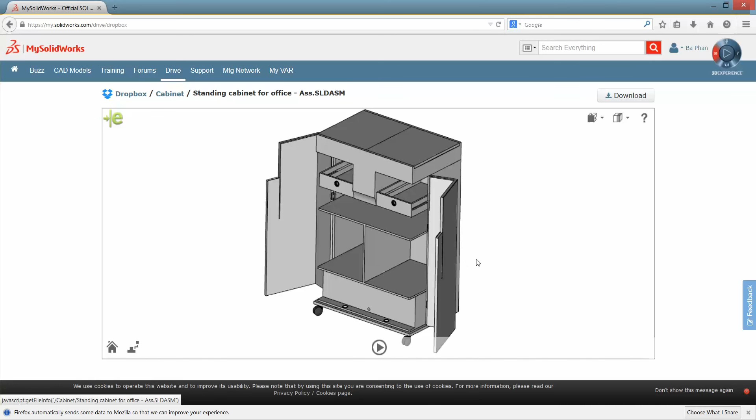So no installation of e-drawing is required. It works on Windows PC, Windows 7, Windows 8. It works on Mac as well - I have my Mac Mini at home running Mac OS, and it worked perfectly. It also works on iPhone, iPad, and Android devices. The user interface is very straightforward.

Press the left button to rotate it, press the right button to move it around, and then you can use two fingers on your touchpad to zoom in and zoom out.

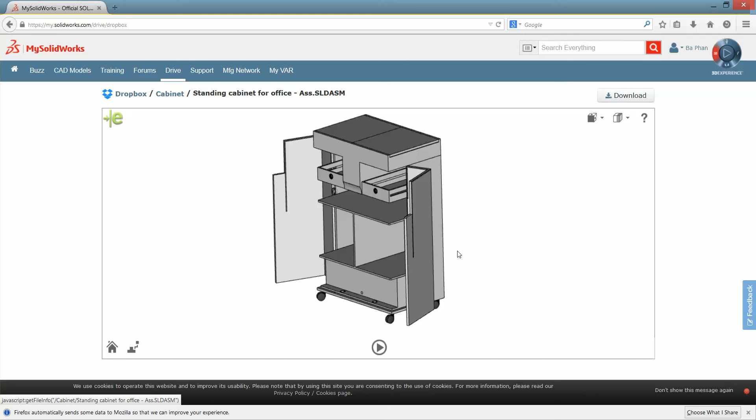You can change to a different type of display. Here you can change the view. I want an axonometric view. You can change how you want to display it, whether you want shading with edges or without edges. So that's this, brand new with MySolidWorks 2015.

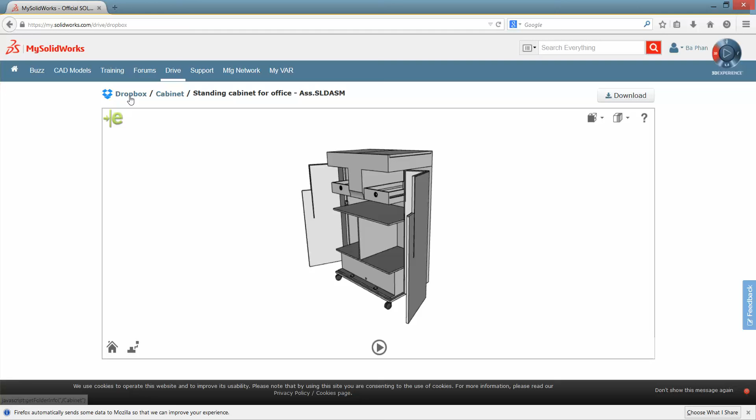Okay, go back to browse to another model. Just select Dropbox at the top. This time let's go to something a little bit more complicated. Remember the Holmatro? Here you go.

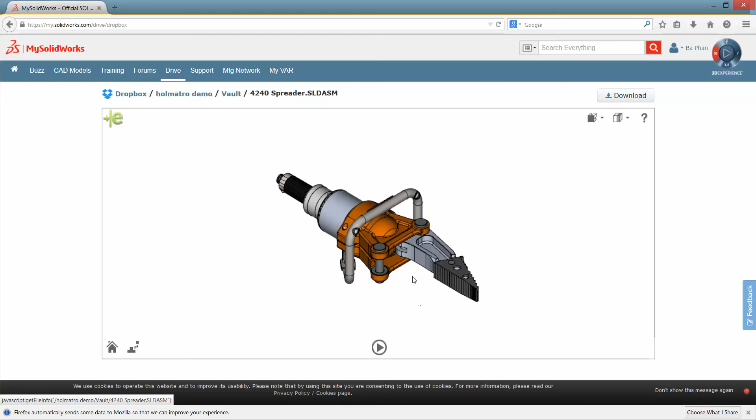So let me check this assembly. Okay, here we go, it's coming. That's good, right, so you can rotate it. Okay, you can use this function to explode it - see how you can control how you want to explode it.

Your assembly, suppose you already have the explode view created. Okay, I'm sorry, I clicked too fast. Go back to my drive. My mouse is a little bit sensitive.

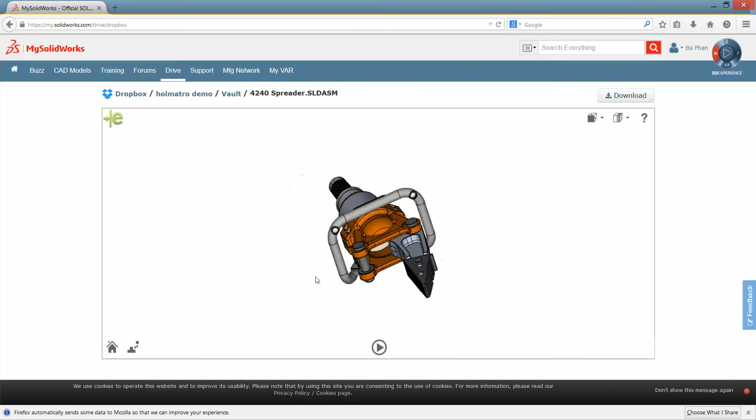Here you go. I'm just using my touchpad, so let me make sure I won't click something wrong. Okay, can zoom in. Right, okay, good.

If you really want to download something, you can download it from here. Let's say if you want to share with Dropbox, you can share files, you can share folders - say you want to share something with your supplier, your contractors, or your co-workers that has a home office.

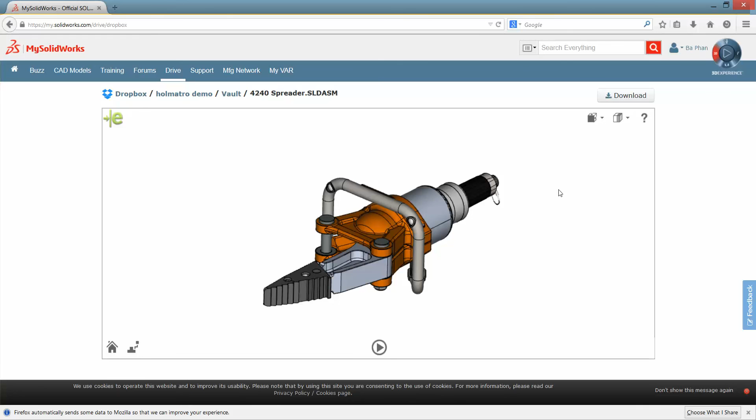This is what you get with your Dropbox. You can pick a particular folder, and if you know the email of the person's Dropbox account, you can share that folder with them. So when they go to Dropbox, open MySolidWorks, they can see the model and decide which one to download. Is that good? Is that beautiful?

Right, so good. Now let's go to CAD model. CAD model now populates all the CAD models in 3D Content Central. Go to 3D Content Central, just do it there. Here is actually the portal, one of the front ends for 3D Content Central.

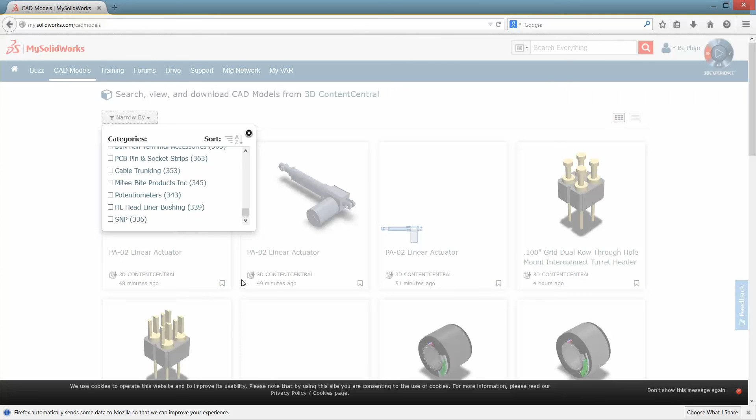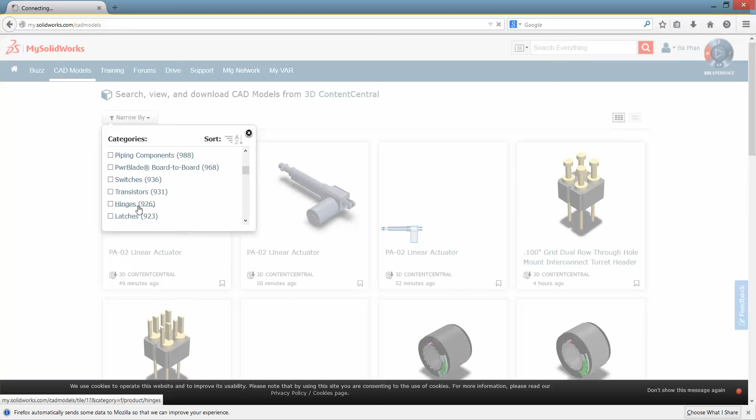Let's say I go check whether I have any particular part, for example. Oh no, we go back to CAD model. I want a hinge, for example. Okay, so most of these hinges come from one company, with their name on the website there, spep.com. Let me have a look at this particular hinge, for example.

So you see the usual e-drawing come up - this is only a part, so that's why I don't have the explode view icon on the bottom left of the screen. It also has this catalog from Sierra Pacific Engineering and Products. Click on this to bring it into 3D Content Central, where you can decide which file you want to download, how you want to download it, which format you want to download, and if you want to buy it, just contact Sierra Pacific.

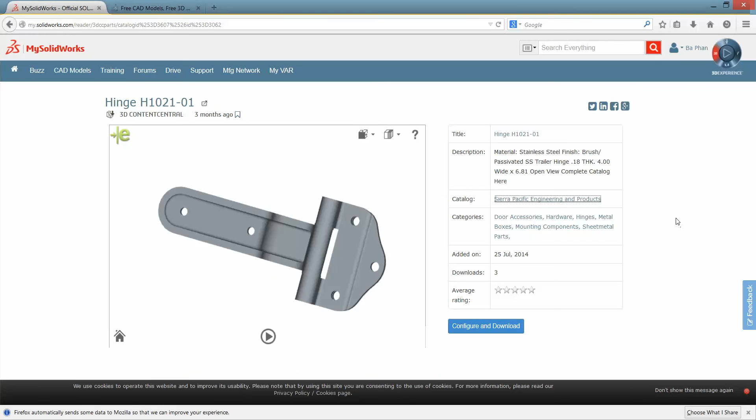Okay, so this is the mysolidworks.com version 2015. On top of this CAD model, you can see you also have all the training files. Some come along with my subscription, which is the standard MySolidWorks subscription. Some I need to have a MySolidWorks professional services account, so I can get into more complex or more complicated, more advanced training.